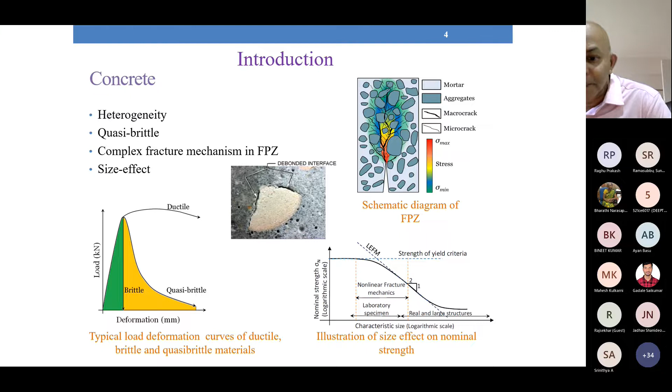When we come to concrete structures, as I told you, concrete is heterogeneous, quasi-brittle. There is a lot of micro cracking that takes place in the fracture process zone, and a lot of toughening mechanisms occur.

Also, when you look at the loads which act on this structure, very seldom do we have a concrete structure wherein we have simply a monotonic or static load. Most of the time, concrete structures are subjected to fluctuating loads known as fatigue loads, which are random in nature, and this fatigue leads to progressive, localized, and permanent damage in the material.

Because of this permanent damage, it is a very good material for applying the principles of thermodynamics, especially the principles of irreversible thermodynamics, to explain the process of damage in the material.

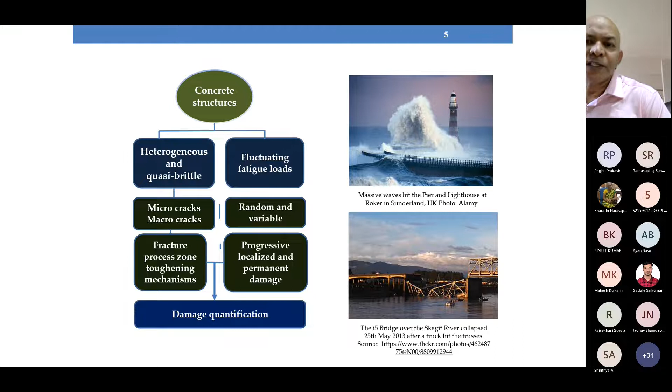From the literature, as we all know, fatigue, especially when it comes to ductile materials, is very well explored. There are a lot of laws which people use, starting from the SN curves. SN curves are still used in the design of ductile materials.

Then for damage, we have Miner's rule, wherein different factors influencing fatigue, like stress level, stress ratio, frequency, all these are considered. So for metals, it's very well understood, the mechanisms of fracture under fatigue and the crack growth.

But when it comes to concrete, all these laws have been applied to concrete, but because of the presence of the fracture process zone, and since the mechanisms of fracture and micro cracking are different from those in metals, we cannot apply the laws available for ductile materials to concrete.

Although the well-known Paris law is applied, modifications have been made to it. Damage mechanics principles have been applied through the evolution of damage, explained through internal variables and thermodynamic concepts. Statistical models are present, but all these are mostly empirical. They don't consider the physical behavior of the material itself.

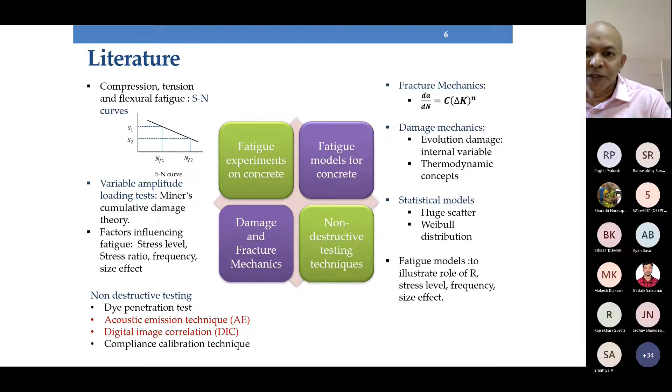Now with the availability of very good sensing techniques, such as the acoustic emission technique, and also using them in conjunction with digital imaging, we can really understand the complete mechanisms of fracture taking place in this heterogeneous material, concrete. So this is what I'll be presenting in the next few slides.

Fatigue in concrete is basically a progressive, localized, permanent damage which takes place due to cyclic loading. More importantly, there are interactions taking place at different levels: micro, meso, and macro, because we have the cement paste at a very small micro scale, fine aggregate like sand at the meso scale, and large aggregates. So the interactions are taking place at different scales simultaneously.

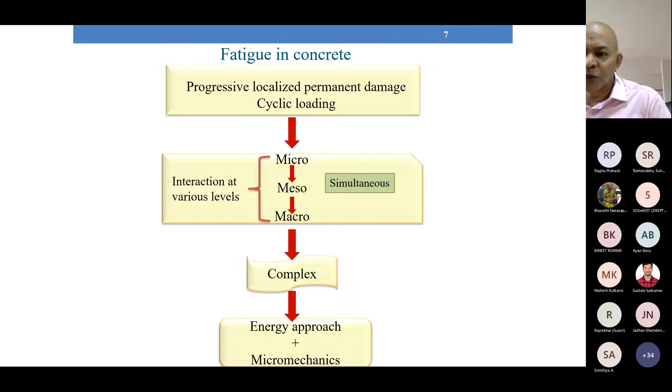So the process is quite complex, and an energy approach would be the most ideal to describe it. When subjected to fatigue loading, we have micro cracking taking place in the concrete. These micro cracks coalesce and form a macro crack, due to which a lot of energy gets dissipated. This energy dissipation can be explained as an irreversible process, so irreversible laws of thermodynamics can be applied, and the damage keeps accumulating with increasing number of cycles, which leads to stiffness degradation.

To explain this complete mechanism, we can use the principles of fracture mechanics or damage mechanics. In this work, we have used both these principles, and we have also interlinked them through energy equivalence, which I will be presenting.

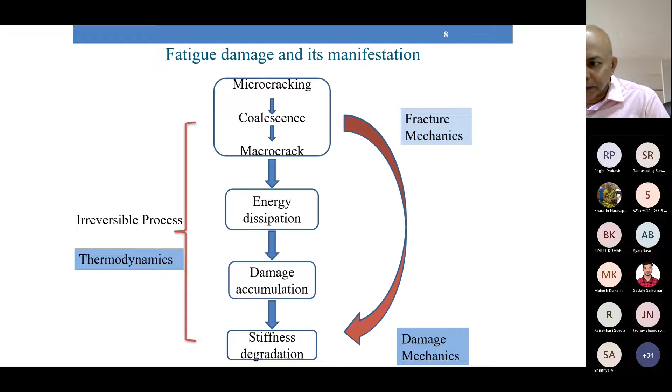Yeah, so to explain the mechanisms of micro cracking...

Firstly, I will present some of the results of the experimental work which we have carried out. We have used 3-point bend beams under flexure. We have used compact tension and wedge splitting specimens, and we have also performed tests under direct tension.

I would like to acknowledge the huge grant of almost 3.5 crores given by IISc to procure a biaxial fatigue testing machine, and also acknowledge the contributions made by Dr. Sundar in designing this machine for our requirement. I will be showing some of the results of the direct tension tests in the next slides.

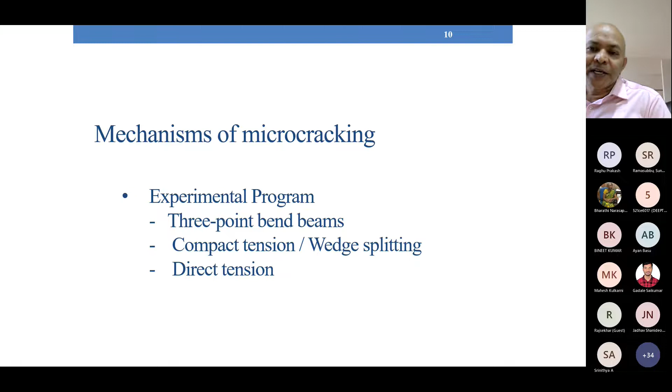Let me explain the 3-point bend specimen. These are 3 different sizes of notched beams: small, medium, and large. They are geometrically similar, meaning the notch to depth ratio is constant for all three, and the span to depth ratio is also constant. The large specimen is approximately 0.8 meters, less than a meter. The medium beam is 0.4 meters, and 0.25 is the small specimen. The thicknesses are constant at 50 mm.

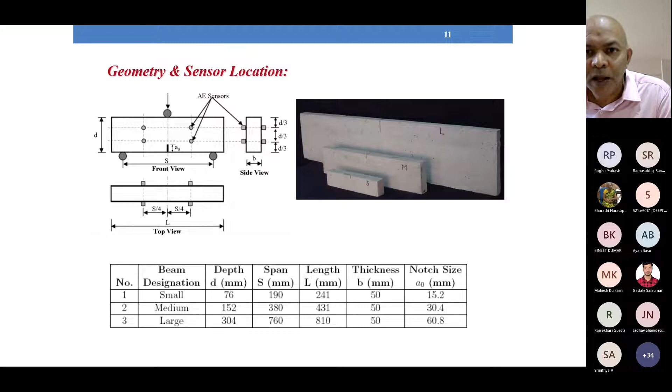There is a notch provided, and then we have used acoustic emission sensors. I will show you the acoustic emission sensors later on, along with all the instrumentation.

I would also like to mention that the number of researchers working in the area of fatigue of concrete is very few. People have worked in fracture, but under fatigue, because of the extensive experiments required, the testing machines needed, and the time taken to perform these tests—some of these tests have taken almost 7 days continuously for failure, depending on the frequency of loading—the number of people doing experimental work under fatigue is very few.

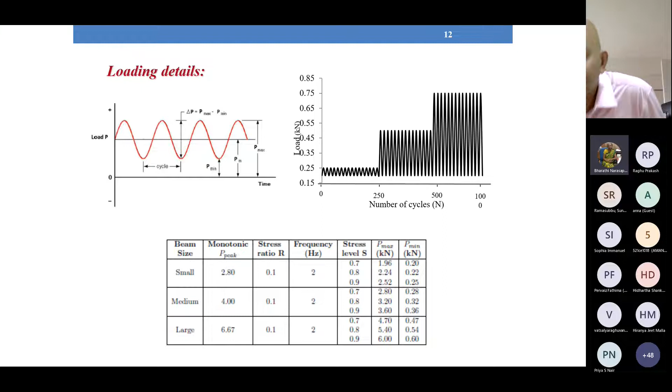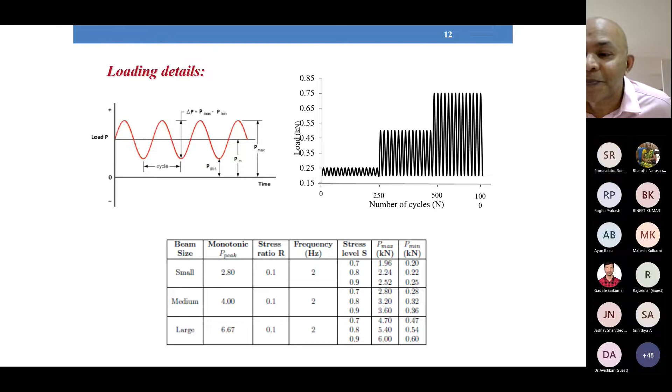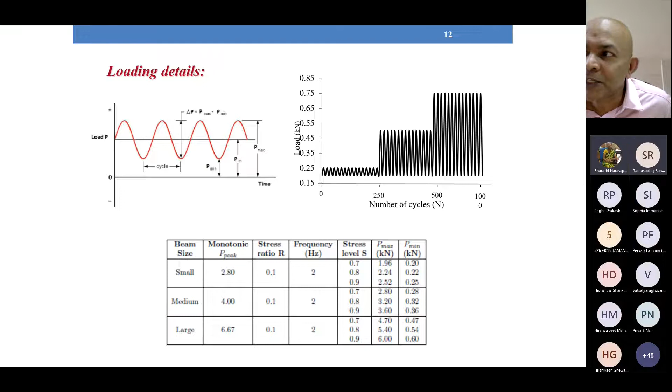I think it could be a network problem. I think you are on slide 12. Right now I'm on 12 too. In my laptop also it's still on the first screen. That is your title screen. Oh my God, try to reconnect, it could be the network or connectivity issue. I'm also seeing slide 12, but everything else is recording fine since I've done the recording too, so that is going on, but only the slide seems stuck.

Maybe I'll switch off my camera also. So for those whose slide is not changing, maybe you can reconnect and check.

That's a good idea, I see a lot of messages in the chat box saying they're seeing the 12th slide. Sync to presenter. How do I do that? You can sync to presenter. I don't know, I don't see that option.

There is an option for the presenter where the bar for changing slides appears. Yes, there is a bar for changing slides. Oh, the guest is able to change slides. Actually one of the participants is able to change slides. But anyway, that doesn't matter.

This must be a very powerful software. Even I'm having a slight problem because although I have a large monitor, it's not clear to me when I'm presenting. Shall I continue? I think the participants have figured out how to sync with your talk, so just continue the way you have. Yeah, I think you're doing fine. Okay, fine, then I'll continue.

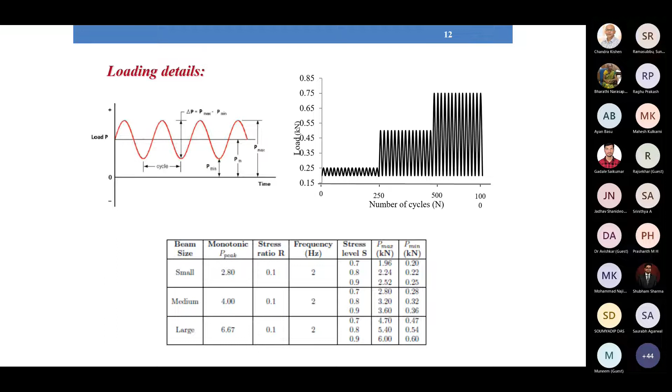This is the setup of acoustic emission. These are piezoelectric sensors operating in the frequency range of 35 to 100 kilohertz. We used 8 sensors, and in some tests 6 sensors, with 4 in the front and 4 behind. These sensors are connected through preamplifiers to a data acquisition system.

This is a typical signal received from the acoustic emission sensor, showing the duration and amplitude. We set up a threshold of about 35 decibels, because anything below that, especially for concrete, a threshold of 35 to 39 works well. So we set it to 35 decibels, and anything below that signal we don't analyze.

All the peaks that crossed the threshold we call an acoustic emission count. If the same peaks are registered by all sensors, or at least 4 of them, we call that an event. An event can be physically understood as some kind of micro crack taking place in the material. So whenever a small micro crack occurs, that results in an event. In acoustic emission parlance, an event can be considered a micro crack.

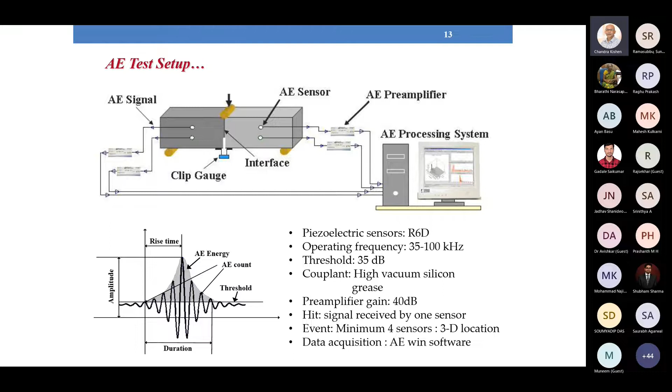For digital imaging, we used black spray paint on the surface of the concrete beam to get a speckle pattern, and using a 12 megapixel resolution camera mounted on a tripod with a remote, we took continuous digital images, or even video. Later, using a correlation algorithm, we analyze these pictures and determine the displacements and strains on the surface of the material. The idea was to get all the surface information using digital imaging, and all the information from within the material, the micro cracks, especially the events which we call micro cracks.

The complete 3-dimensional location of the event can be captured because we are using 6 or 8 sensors. Through a triangulation scheme, we can easily get the location of the event where the micro crack is occurring inside the beam.

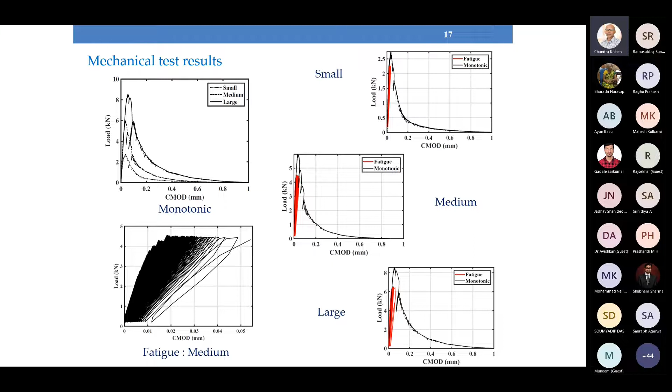There is some problem in this. The curve is missing. This is missing. There is a load CMOD curve which I don't see. Do you see in your screens a black line showing the load CMOD curve? No, the black line is not seen. I don't know why that is not seen. Okay, basically then I'll skip this.

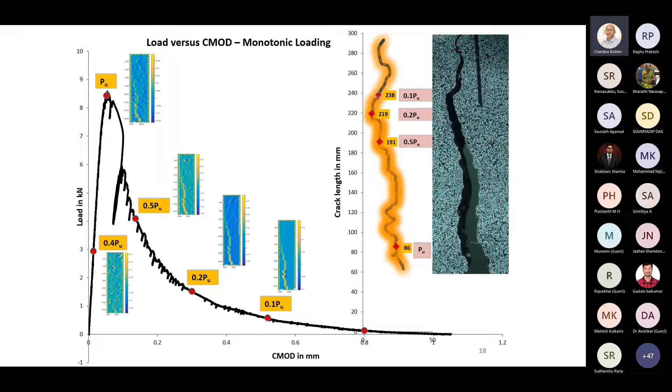What you can assume is there is a black line, just look at my cursor. It goes up to the maximum peak here, and then you see the softening response coming down. Using digital imaging, we have computed the crack length. At the peak load, we don't see any crack. This is at 40% in the pre-peak region, no crack, but at the peak load we see a small crack which has occurred, and then in the post-peak response we see the major cracking taking place. This is at final failure where we see the tortuous crack which has occurred, leading to the failure of the beam.

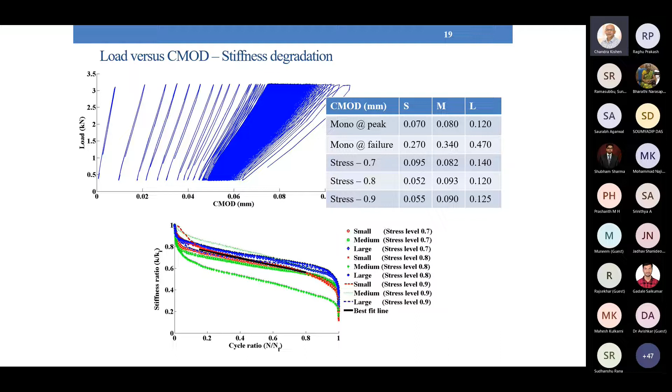So this can be used as a failure criteria under fatigue - that is, the crack mouth opening displacement at peak load in a monotonic test could be used as a failure criteria. Now here, we had this softening curve which was missing earlier. So here I have both the digital images and also the acoustic emission results.

These dots in the acoustic emission are events, and we have different sizes of these dots, different colors. The red one is the largest size, and these are classified based on the energy of an AE event.

If a micro crack appears inside the specimen, these are all the micro cracks appearing inside it, which are projected on the surface. The smaller, light blue dots are the events or micro cracks with low energy. We have classified into 4 energy levels - the smallest is blue, and the red one corresponds to the high energy event.

So what it means is the micro cracks which occur inside the specimen, when they coalesce and join to become a larger crack, the energy content in them will be much higher. As these larger cracks develop into a major crack, high energy is dissipated or released, and that is captured by these red large size markers.

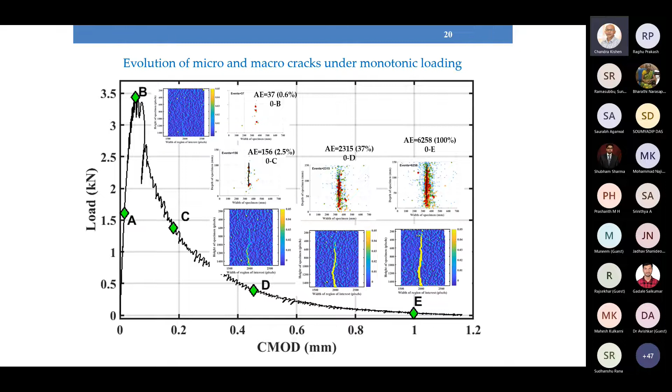Next, under fatigue, we see a different kind of mechanism. Here we are plotting the maximum CMOD on the vertical axis and the normalized fatigue life, normalized with the final failure value. So 0 to 0.25 indicates 25% of the fatigue life, and in the first 25%, only 2% of micro cracks or events have formed - 2% of the final 3,347.

In the next 25%, up to 50% of the fatigue life, only 4% of micro cracks have formed. The reason is the amplitude of loading is smaller - we have not gone up to the peak, it's about 80% in this figure. But although 50% of the life has passed, the number of micro cracks formed is still much lower.

What we see here are only the small dots, the events of low energy. But in the next stage, from 50% to 75% of the life, we see the acoustic emission events increasing. It has gone up to 20%.

But in the final 25% of its life, 80% of the micro cracks have formed. This image shows the crack profile on the surface - we see there's hardly any crack propagation, and this is taken one cycle prior to failure, and this is at failure. So just before failure, all these micro cracks coalesce and form a major crack, shown by these yellow dots - the higher energy events.

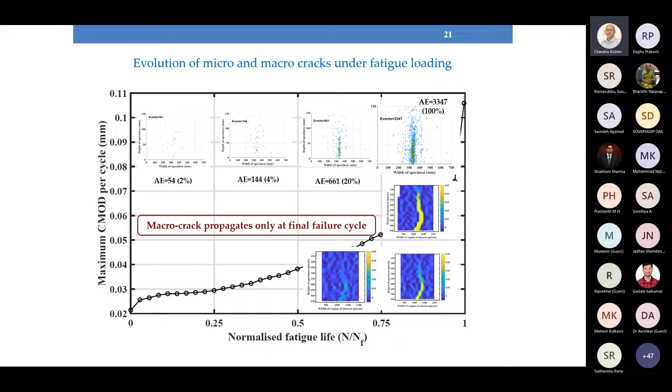Whereas in the case of monotonic static loading, we see that high energy events are formed right at the beginning, which is seen in the next slide. Here we are plotting the AE energy in attojoules. This is a normalized time - it can be normalized CMOD as well, because it was done under CMOD control with a constant rate. And this is the load on this axis. The black line indicates the load versus time relationship, or load versus CMOD relationship.

These dots - the blue ones - are the low energy events, meaning energy level from say 0 to 10 to the power of 3, 1000 attojoules, followed by green, orange, and red. Red ones are the high energy events. In the case of a monotonic static test, we see that right from the beginning, all energy levels are present in the events, with simultaneous interaction especially during the softening region. We see the growth of micro cracks to be very large, and at final failure, this reduces.

Whereas in the case of fatigue test, we see that almost up to 75% of the life, not many micro cracks are formed, and we don't see these red dots during the initial life - it's because only small cracks are formed. They are dispersed across the depth of the specimen, and only during final fracture do we see these red dots indicating that all these minor cracks coalesce to form a major crack, and sudden crack propagation takes place.

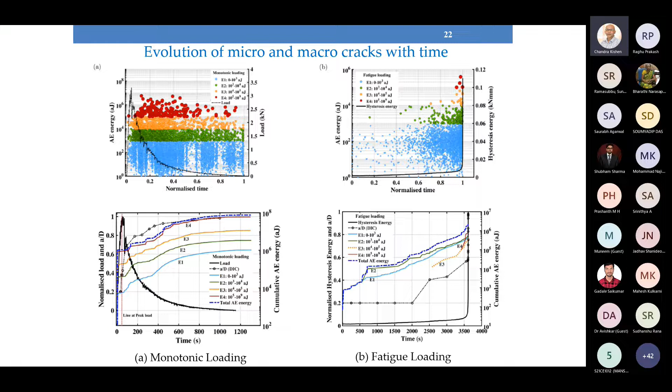Here we see the difference through these bar charts, wherein the blue ones indicate the percentage of events, that is the microcracks, and the orange one is the energy. So under monotonic loading, nearly 80% of the events are formed initially, but the energy is very low. That means at the beginning a lot of microcracking takes place, but the magnitude of energy release is low. At final failure, the higher energy acoustic emission events are generated, leading to the final failure.

Whereas in the case of fatigue loading, almost all different energy contributions are there. The number of events, E1, corresponds to a large number of events, almost 90% of the events compared to energy level 4. That means only microcracks are formed for almost 90% of the life, and later on, just before failure, they coalesce and form a macro crack.

So what we can say about the failure is it's more like a brittle kind of failure, a sudden failure, which occurs under fatigue loading.

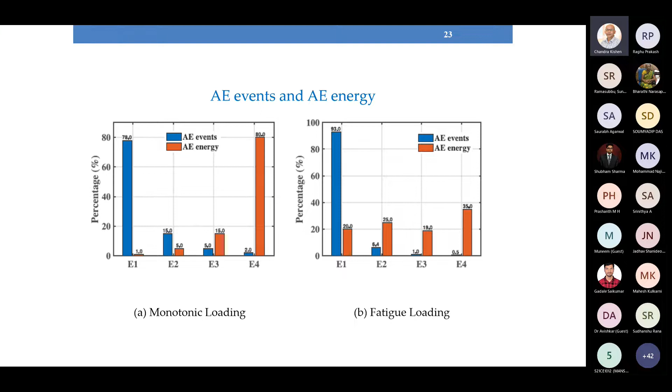Now from the acoustic emission events, we can also plot density curves, the relative density of the localized events, and get a picture of the shape of the fracture process zone. The morphology of the fracture process zone can also be obtained from the acoustic emission events.

Here the size of the fracture process zone is calculated using the distribution of the acoustic emission events. We draw a histogram, with the front face, that is the beam length, plotted here, and this is the depth of the beam. You can see a black line appearing here. The intersection of this histogram with about 20% of the total acoustic emission events gives us the depth of the fracture process zone.

Same thing here, we have the histogram, and the intersection with this 20% line gives the width. This 20% line was arrived at by other researchers, available in the literature, who proposed it as a way to determine the width of the fracture process zone.

And here we can see the thickness. Along the thickness also, all different energy acoustic emissions are spread across. So across the thickness we see all energy events, but due to the free surfaces on these two sides, we see more large energy events occurring in the middle portion.

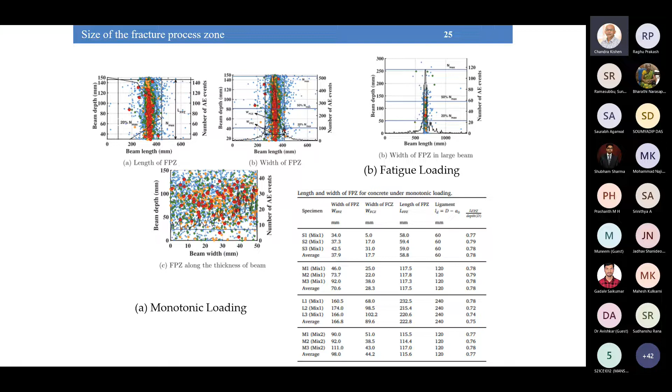But now coming to fatigue loading, we don't see a large fracture process zone. So let's look at other results. Generally, to predict the fatigue failure, the static envelope curve is used as the fatigue failure criterion.

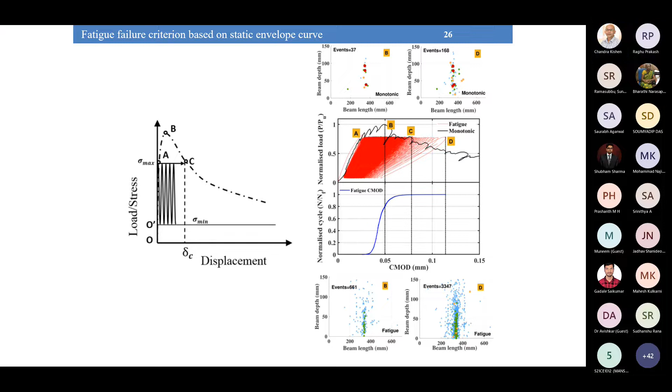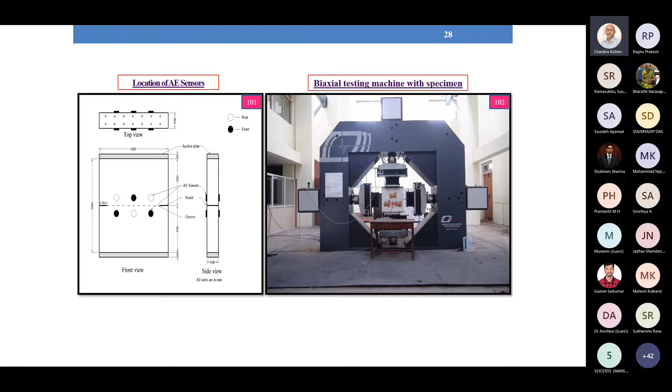Currently, in all the finite element models, the failure envelope or failure criteria used are based on experiments done on very small lab-size specimens, basically 150 millimeter cubes. And these failure criteria are applied to structures like dams and bridges, which are very large. Since concrete exhibits a strong size effect, we have to make a correction for those failure criteria.

So the best way is to perform these tests on large specimens - here large means as large as 1 meter by 1 meter, instead of using a 150 millimeter cube. That is what we are planning to do, but these are the preliminary results. What we see from the acoustic emission is how the evolution of micro cracks has taken place under direct tension. We are still working on this, and what we see is the number of events.

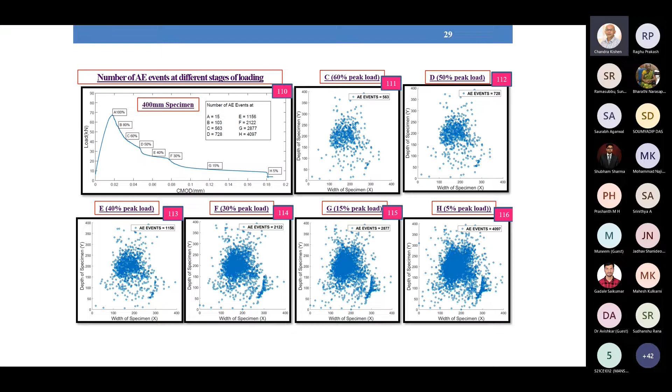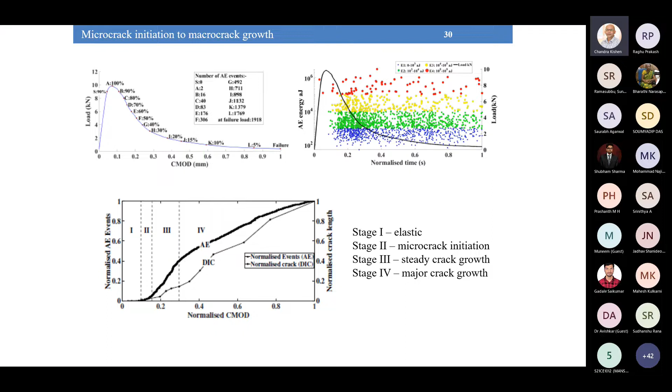Those are the experimental results. Let me next go to how we make use of these experimental results in developing a fatigue crack propagation law. People have used the Paris law, the modified version of it, and obtained many empirical relationships. But what we thought is, we now have a good set of experimental data, so why not use it, because we see that energy dissipation takes place. Thermodynamics is the best subject to apply for fatigue crack propagation, through what is known as the dissipation potential and entropy.

Starting with the simple basics of thermodynamics, we have a thermodynamic system completely determined through state variables. In the state variables, we have observable variables like strain - we can observe it, we can fix a strain gauge, we can fix a thermocouple and get the temperature. Then we have other variables known as internal variables, which can be elastic strain, inelastic strain, or area of a crack, which we have made use of in this analysis.

Then we have the thermodynamic properties. Associated with these state variables, we have the associated variables. The associated variable connected with strain is stress, with temperature is entropy, and so on. So we define 2 potentials: thermodynamic potential and dissipation potential. This thermodynamic potential describes the elastic behavior, through which all the laws of linear elasticity can be obtained.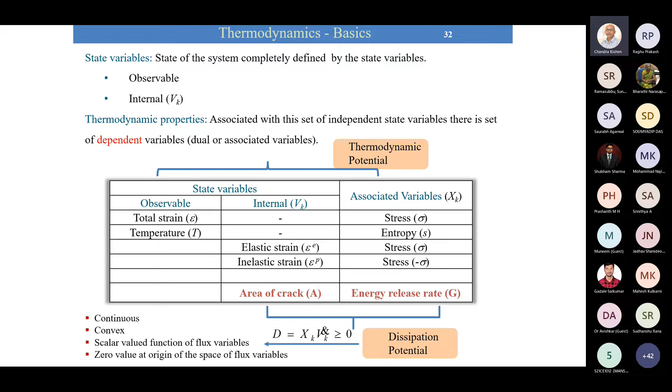Here, to start with, we have done this using fracture mechanics and damage mechanics. For fracture mechanics, we have used the area of the crack or the length of the crack - we can assume, because the thickness is constant, as the internal variable, and the crack is propagating due to the energy released. This is some kind of force which we are applying. So we have developed a relation - what we need is to get the rate at which the crack grows, A dot.

Here we need a potential - a potential function is required, and this potential function is available in the literature. Some empirical relationships are present, but here we thought we will make use of dimensional analysis to obtain the relationship of this potential from first principles, using all the factors which contribute to it - that is the force parameters, loading parameters, which are contained in this delta G, the energy release, and R, the stress ratio.

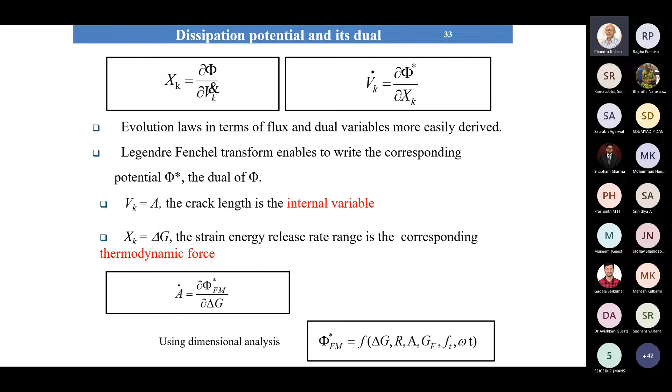Then we have the geometry properties, that is the area of the crack. Then we have the material properties parameters: the fracture energy or fracture toughness, and the tensile strength. We have included all these factors, and these are the different variables which we have used, along with their dimensions.

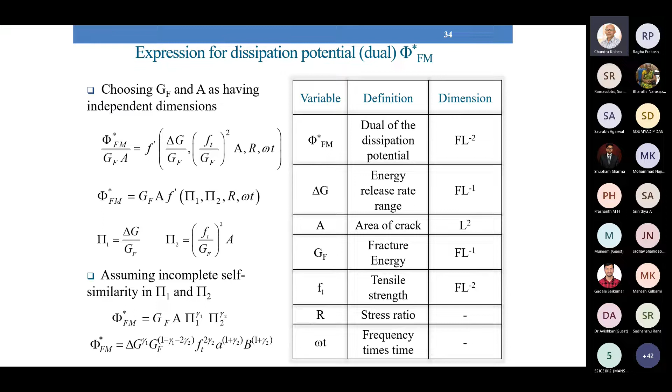Through dimensional analysis, we could obtain an expression of this type for the potential. From this potential, we can obtain the rate of crack propagation. There are two constants here which are determined through calibration of some experimental results we have done, and obtained this.

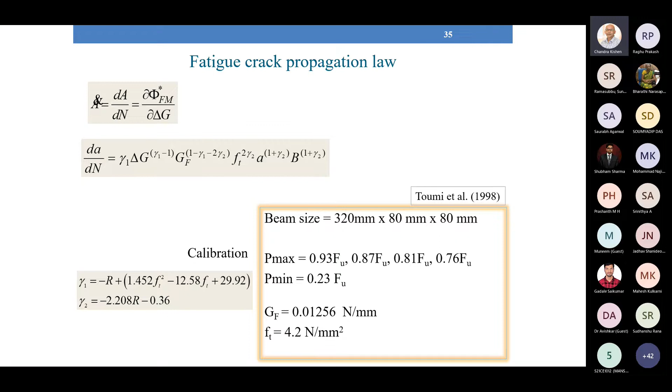So this is the calibration. We have calibrated this from the experiments here, from experiments of Toumi et al. and others, whereas we have validated using the experiments of Bazant and other experimental results available, and we see a very good agreement between the model which we have obtained.

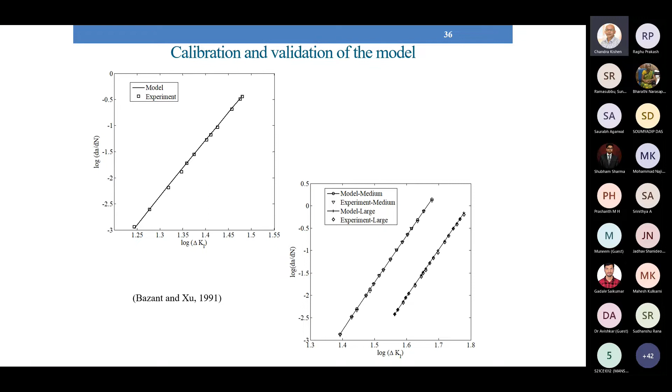So this is another validation using different experimental results for different R values. Again, we see a very good agreement in this.

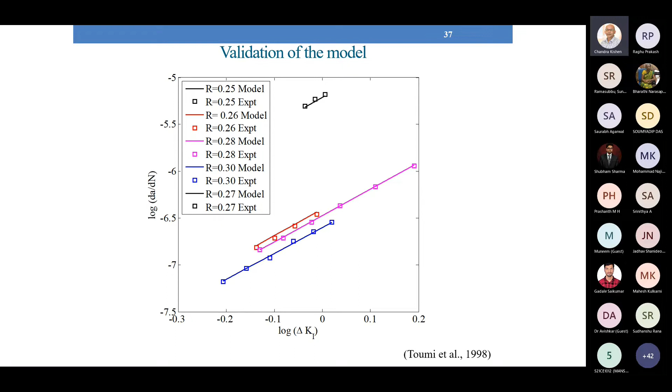We did a sensitivity study wherein all these different parameters involved in this rate of crack propagation are considered as variables, and through the mean and standard deviation we obtain the tornado diagram, and find that the crack length is the very sensitive parameter.

So in order to determine the crack length or the number of cycles to failure, the crack length has to be resolved at a very small level, accurately, we have to obtain that.

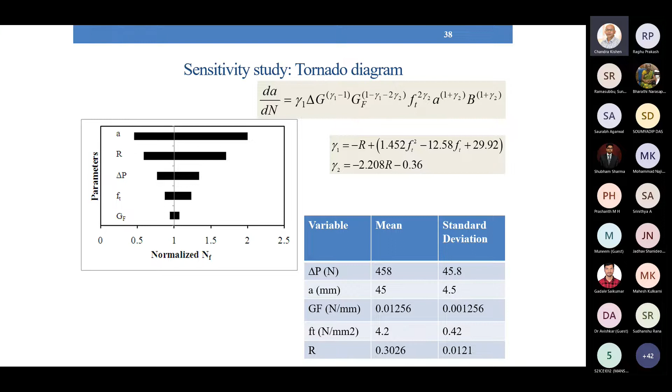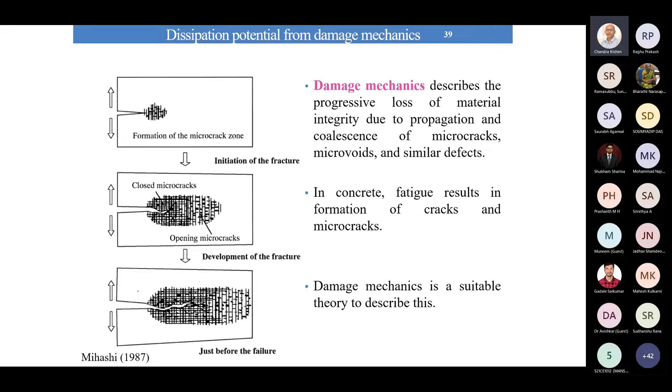Similarly, that is from damage mechanics, the same thing we can apply. I'll skip some slides in the interest of time. I'll take about 5 to 7 minutes now.

So again, instead of taking the state variable earlier as the crack area, we take a damage zone, some kind of damage parameter. And then we have an associated variable, which is the damage strain energy release rate.

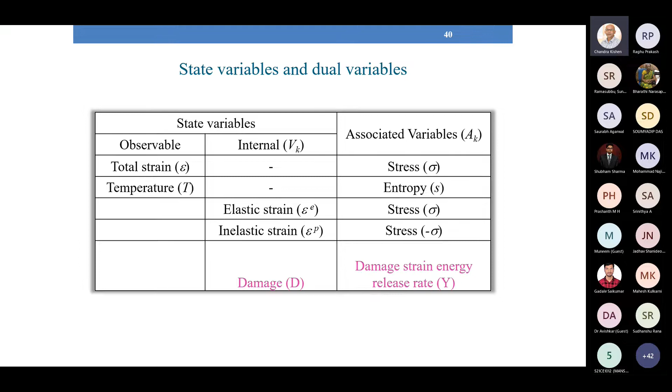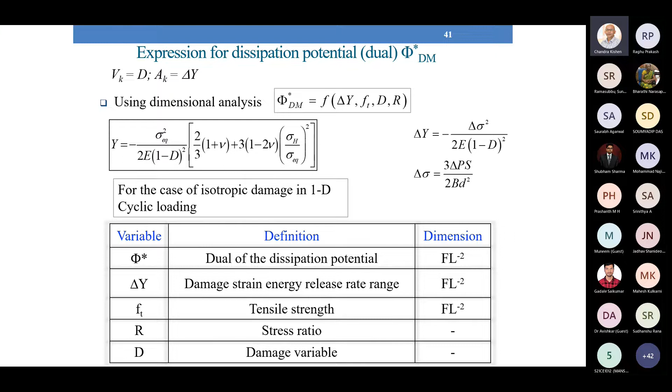Again, through dimensional analysis, we could obtain the dissipation potential from damage mechanics, DM. Using dimensional analysis, we could obtain a relationship between the rate of damage and other physical parameters, including the material parameters, the loading parameters, and also the geometry parameters.

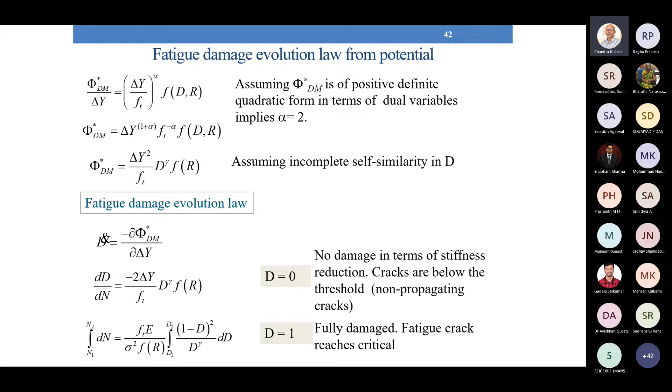And the damage which we have considered is a scalar damage, wherein 0 stands for no damage or no cracking or no reduction in stiffness, whereas D equal to 1 stands for fully damaged. So here we consider a representative volume element and propagate the crack step by step.

And we can determine the number of cycles taken for the crack to propagate in each step. That is, in each step we assume that the damage initially is 0, and once it reaches 1, we determine the number of cycles and carry out the analysis.

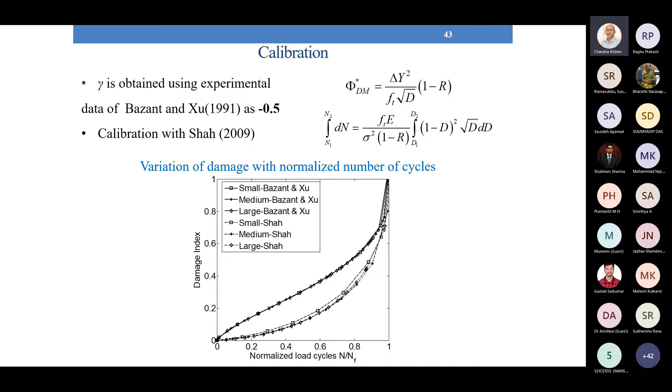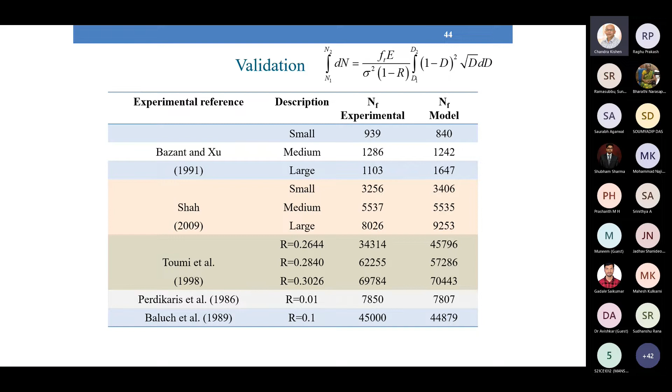Now, since we have obtained both the dissipation energies, dissipation potentials from fracture mechanics and damage mechanics, we have tried to connect both of these through the principle of energy equivalence.

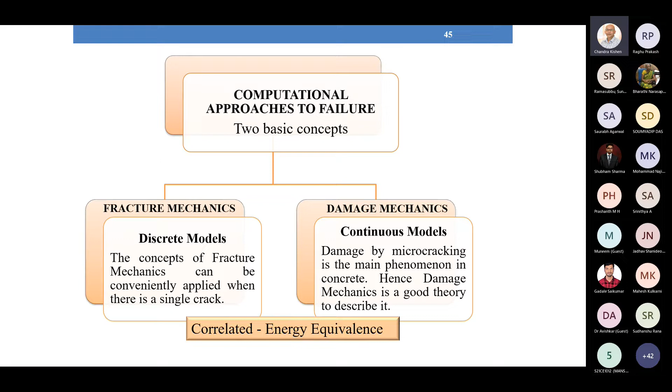In the energy equivalence, we have a damage zone, and in fracture mechanics we have a crack. So the amount of energy required to propagate the crack should be the same as the amount of energy dissipated in a certain volume of the damage zone.

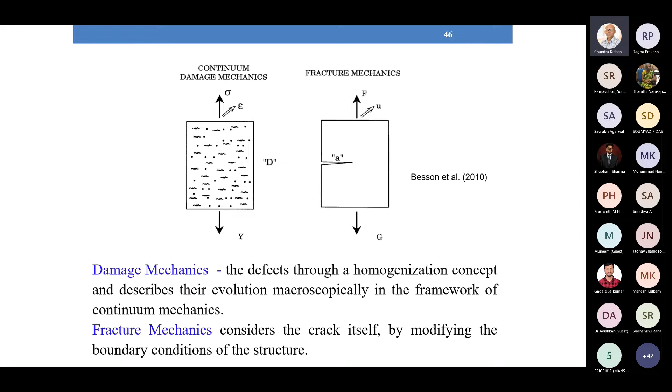So using this kind of energy equivalence between the two systems, here we have a crack and here we have a damage zone. Using both the thermodynamic potentials from fracture mechanics and damage mechanics, we could move from one theory to the other.

That means if we have a finite element software which uses discrete crack models, and we know the damage zone, we can convert it into a discrete crack. Or alternatively, if we have software which uses continuum damage mechanics and we want to convert it back to a discrete crack, we can use this energy equivalence.

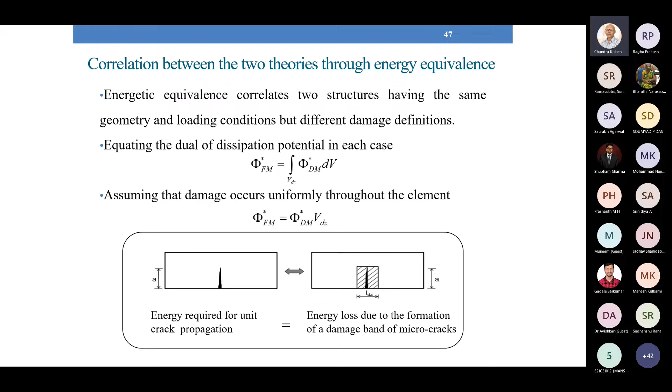So it will help us in moving from one theory to the other. That's the advantage of this.

The last part is about entropy. Basically, according to the second law of thermodynamics, every irreversible process means that if we load a specimen and a lot of frictional energy dissipation occurs due to micro cracking, on reversing the load we cannot recover this energy. So it's an irreversible process, accompanied by a gain in entropy, and the amount of entropy gain depends upon the degree of irreversibility. So the energy dissipation can be related to the entropy gain through this relationship, where T is the temperature, S is the rate of entropy, and E is the energy dissipation rate.

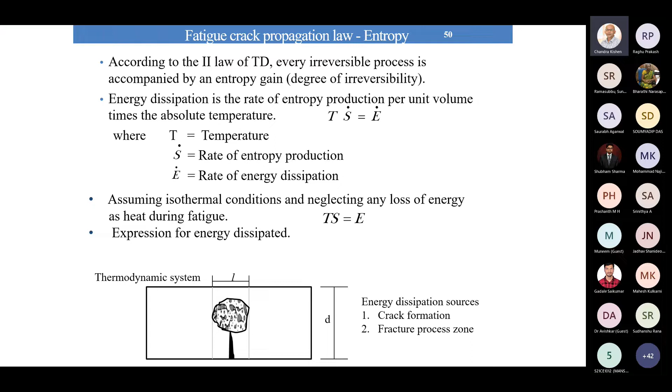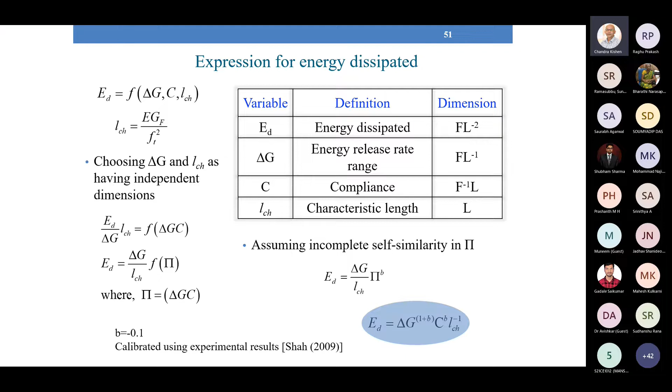Now the thermodynamic system we have considered is the 3-point bend beam with the fracture process zone with a crack. So this is a thermodynamic system. Here again, using dimensional analysis from first principles, using all the variables which contribute to the rate of gain of energy or entropy, we could establish a law for the energy dissipated. Then the calibration and validation is done with experimental results.

And here what we see is, on the vertical axis we have total energy dissipated versus the number of load cycles. That means for a given load cycle, the amount of energy dissipated is the same for small, medium, and large size specimens, what we see here. That means this energy which is dissipated does not depend on the size of the specimen, and we see the same behavior for a different concrete mix.

So the entropy at final failure we have plotted here, and for any size, the depth of the specimen is plotted on the horizontal axis. This we see almost remains constant. Again, this final fatigue failure entropy can be used as a material parameter, or it can be used as a failure criteria to determine the number of cycles it takes to dissipate this amount of energy. So it can be used as a failure criteria.

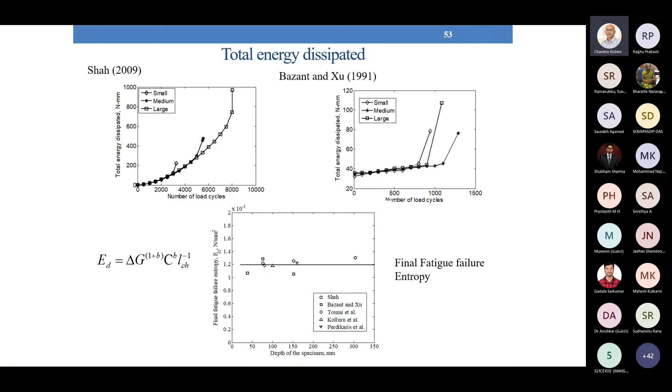So in conclusion, we have seen by using acoustic emission and digital image data, the process of microcrack initiation, coalescence to macrocrack, and the stable crack growth could be very well understood in a quasi-brittle material, and the different failure mechanisms under monotonic and fatigue loading are understood. So what causes the failure under monotonic and fatigue, and fatigue crack propagation laws are proposed from first principles using dimensional analysis in conjunction with thermodynamics laws and the concepts of fracture and damage mechanics.

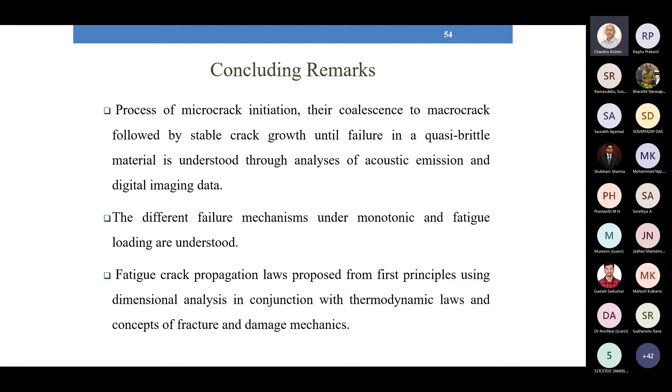And the future directions: we all know that concrete structures such as highway pavements, bridge decks, airport runways, railway sleepers, machine foundations, all these are subjected to fatigue loading, cyclic loading, wherein progressive damage takes place. Now we have established through acoustic emission that the damage process is progressive. It takes place very slowly, but final failure occurs due to the formation and release of a large amount of energy. So what is required is we have to quantify damage. First you have to define damage, then quantify damage in structures which are under service, use the damage evolution law, and predict the remaining life of the structure. So this is what is required, which we are working on.